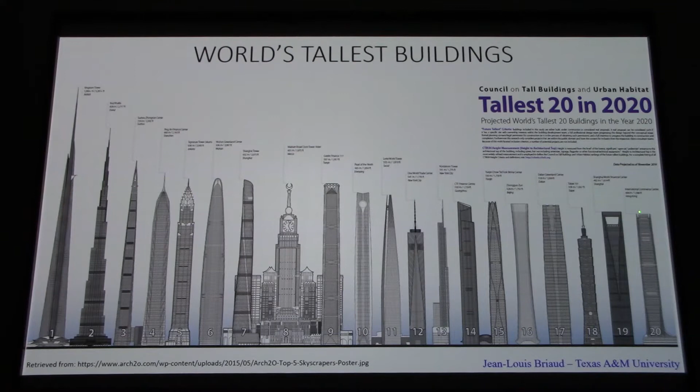So the Burj Khalifa - Burj means tower - is 828 meters high. It weighs 4,400 meganewtons. The area of the base, the foundation, is 3,400 square meters, and the average pressure under the tower is about 1,300 kilopascal. Remember, we've talked before about the Tower of Pisa being around 500, Washington Monument about 500. Today, on soils, we wouldn't put more than about 200 on a shallow foundation, typical. But this one is actually on rock, and that's why the pressure is so high at 1,300 kilopascal.

It was built on a pile foundation, a deep foundation. The piles are 50 meters deep below the mat foundation. So a mat was placed, there was an excavation about 15 meters deep below ground surface, and then the mat was placed, with the piles below that mat. The average soil/rock modulus is about 700 megapascal. We've talked about the modulus of soil being between 1 and 100 megapascal. This one is obviously beyond soils, soft rock around 700 megapascal. The pile capacity was around 30 meganewtons, which is huge for a pile - not a record number, but a very large capacity.

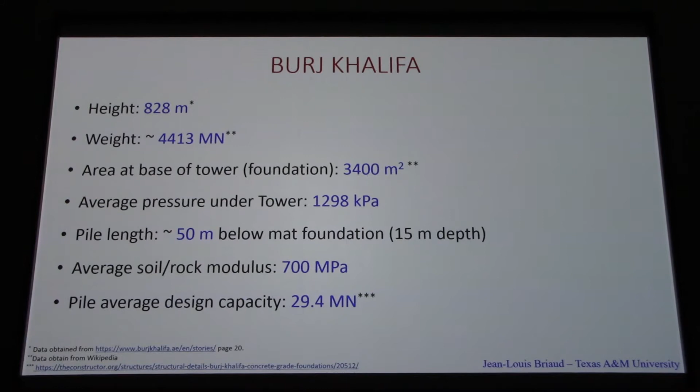So the geotechnical investigation took place. The rock is a calcareous rock with sandstone and siltstone layers. The water table is 2.5 meters below ground surface. About 33 boreholes were used for the investigation. Seven of the piles were load tested - we'll see that in a minute. And 60 pressuremeter tests were carried out. We mentioned the pressure meter in the last lecture as a tool that's quite helpful in obtaining the modulus. These tests were used to calculate the settlement of that huge tower.

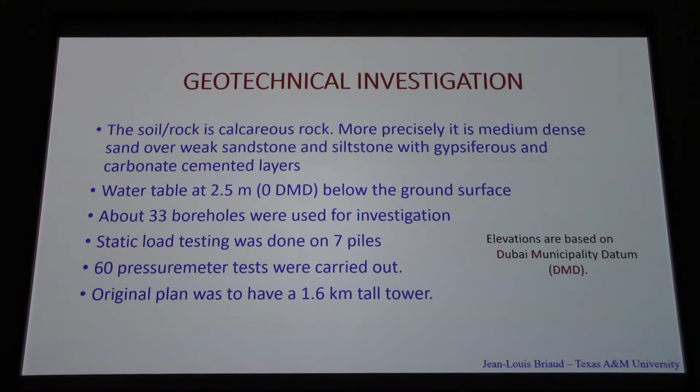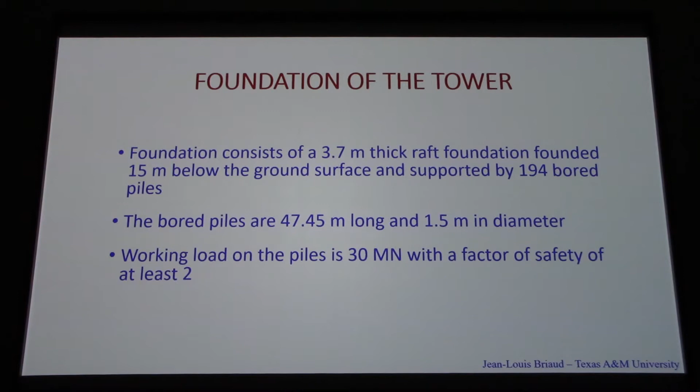The foundation, as I mentioned, is a mat that's 3.7 meters thick, and below the mat you have 194 bored piles. They are 47, so close to 50 meters long, and 1.5 meters in diameter. So again, not a record, but a large diameter anyway. The working load on the piles was 30 meganewtons with a factor of safety of at least 2.

So here is a cartoon of the tower with the foundation to scale. You can see that even though those piles are 50 meters deep, they're very small compared to the length of the tower. But it still looks reasonable, and that's one thing I've told you many times: make sure you start with a diagram to scale to get a sense of whether things are out of proportion, or maybe pick up on some potential problem.

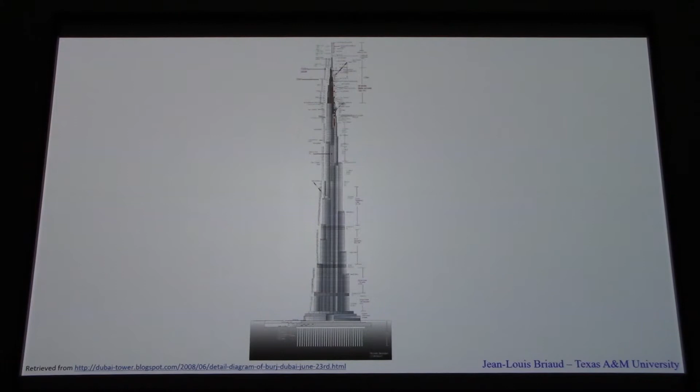I actually went to visit the tower, and I didn't go to the top. I went to the observation deck, which is around 450 meters high, and the elevators are extremely smooth. You get the feeling that you're not moving, and the only reason you know you're moving is because your ears are popping due to the difference in pressure. So it's pretty impressive. Again, I didn't go to the top.

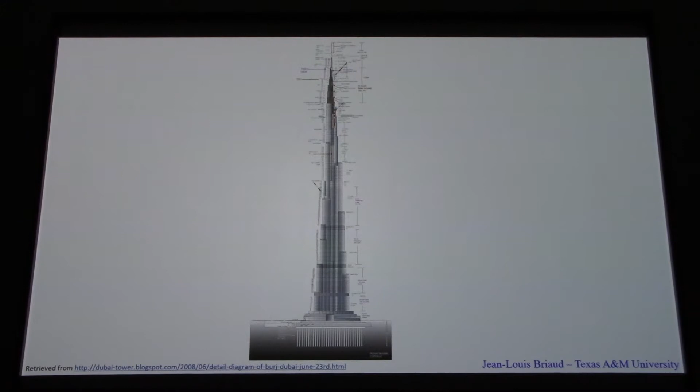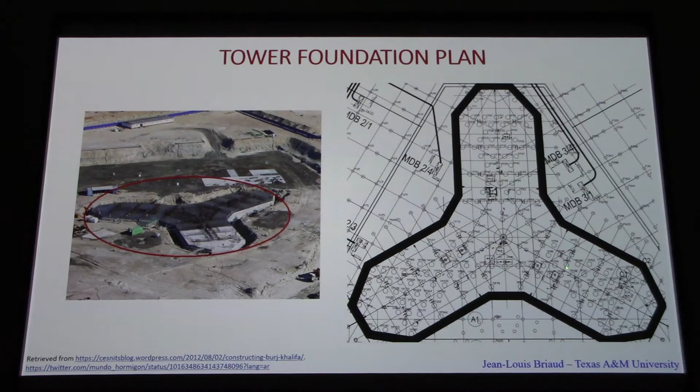So here is the imprint of the foundation. It's a tri-star imprint. You can see all the piles, those 1.5 meter diameter piles, distributed around.

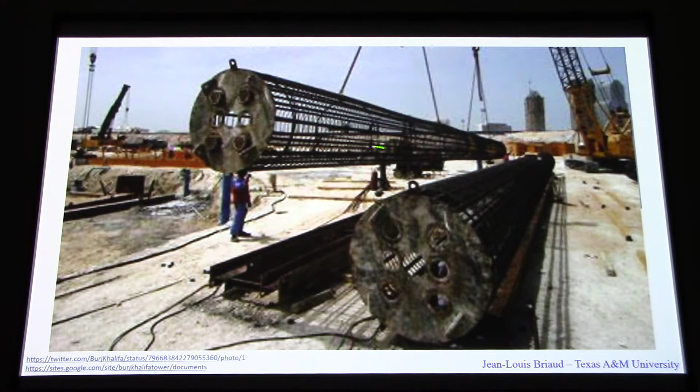Here's a rendition of the piles under the mat. The mat is right here, and the piles, you can see them underneath it. Here's the size of those bored piles with all the reinforcement going down to 50 meters.

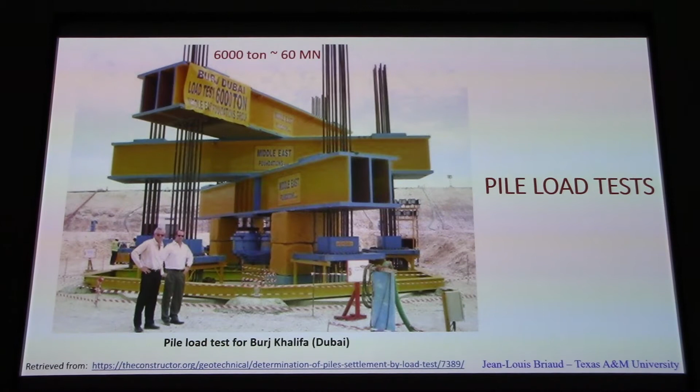They were load tested, and these pile load tests were large pile load tests. You had to go to about 6,000 tons, which is 60 meganewtons, to test the piles for close to 2 times the working load. These are pile load test results.

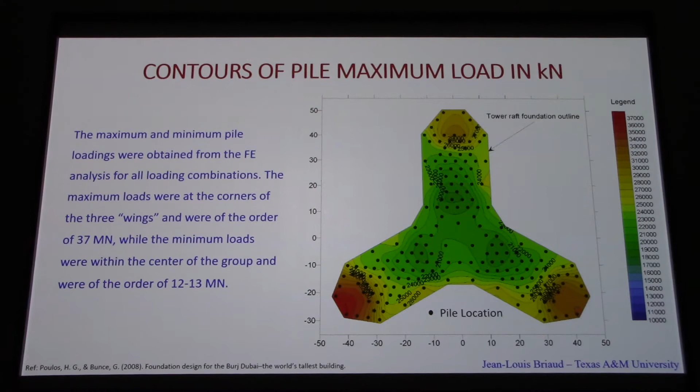I'll pass on this. This is a contour of the piles, and the red is 37 meganewtons. You can see the piles on the outside are more heavily loaded than the piles in the center, probably due in part to the overturning moment that loads the outside piles.

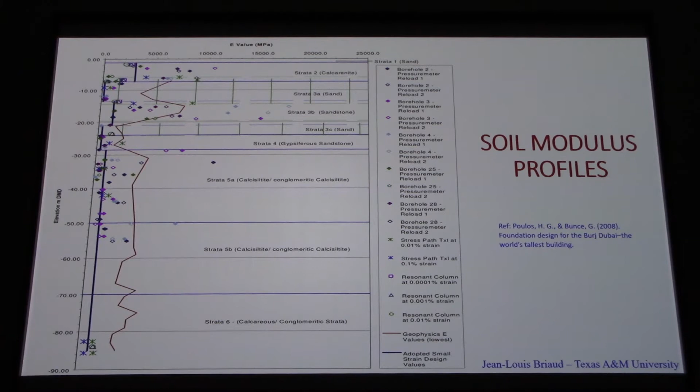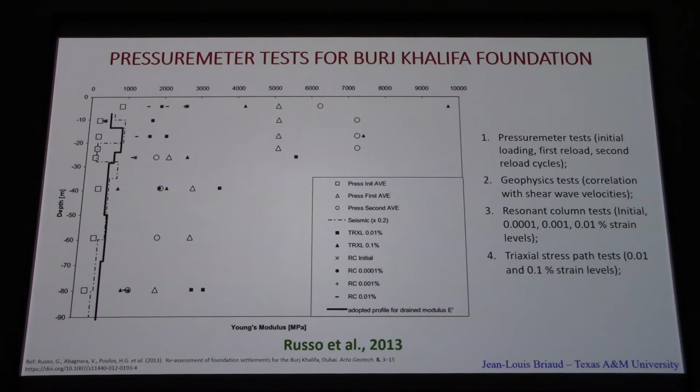Back to the soil modulus profile. Again, the need to select a profile to be able to calculate the settlement. This is isolating the pressuremeter test results, along with some of the other results, and then the final selection by the engineer to obtain the design profile. So somewhat conservative, but not all the way down to the bottom. Obviously it takes a lot of experience to make that type of selection.

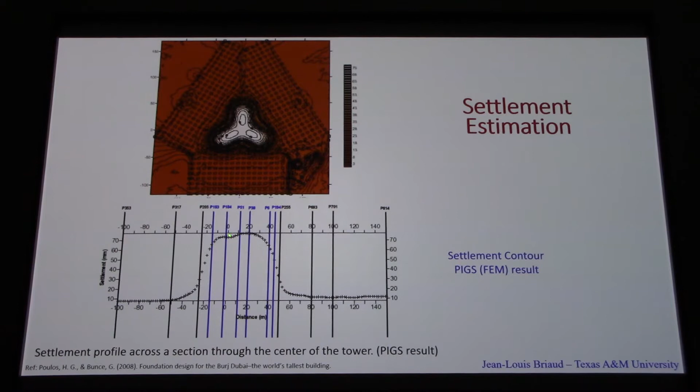This is estimating the settlement using the finite element method, and the settlement across the width here, and you can see the dishing effect of the foundation.

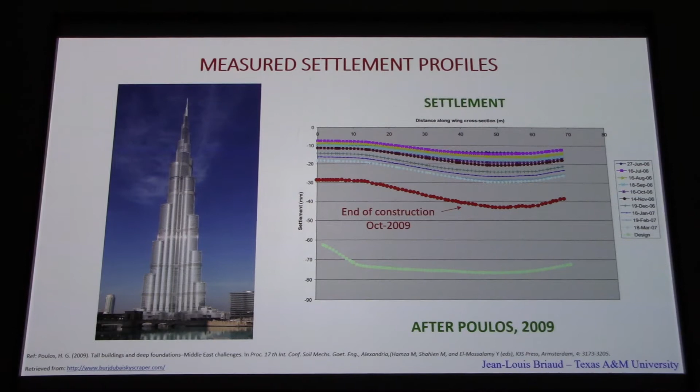So I wanted to include this because we just looked at that settlement equation in the last lecture: S equals I times 1 minus nu squared, times P, times B, over E, where S is settlement, I is the influence factor, nu is Poisson's ratio, P is the design pressure, B is the width of the foundation, and E is the elastic modulus. I was 1.3, you find this in the book.

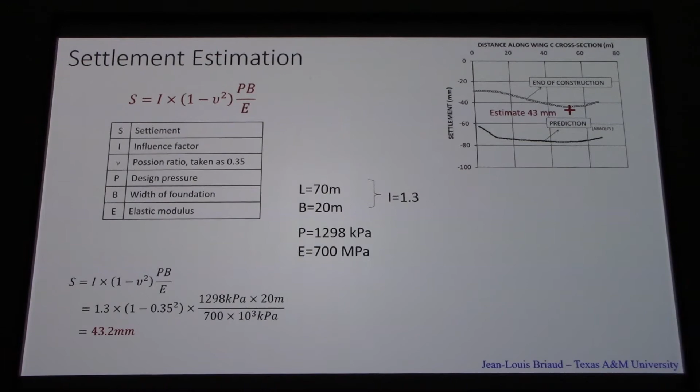The pressure we discussed is about 1300 kilopascals. The modulus from the profile, average modulus, is 700 megapascals. So if you apply that equation and multiply everything, you find 43 millimeters, which is remarkably close to the actual measurement. Obviously, the selection of this modulus here, we had the answer, so we were able to match one and the other. But the 700 megapascal is kind of an average value within that pressuremeter profile.

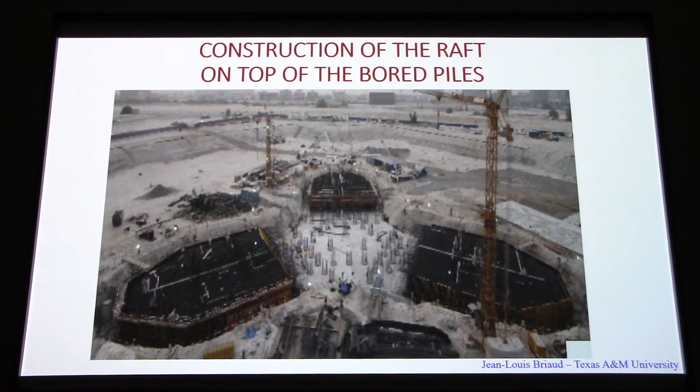So here is the foundation being constructed. You can see all the bored piles here, and then the mat, the reinforcement for the mat is being laid out. And then the mat is completed.

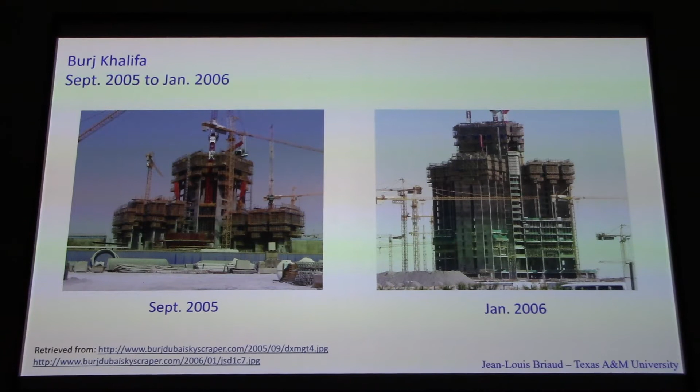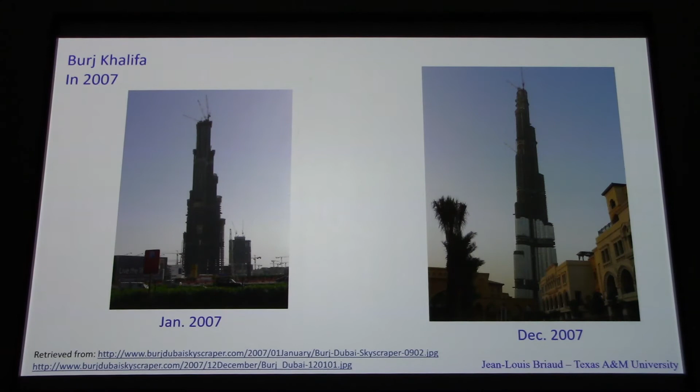So this is January 2005 right here, and then it keeps going. September 2005, January 2006, January 2006, December 2006, and then on and on and on. Coming into 2007, December 2007, January 2008, December 2008, and then December 2009, the completion of the tower.

So, when I look at those fantastic structures, I say to myself, these are my civil engineering colleagues building those structures, and that is mighty impressive. I keep being so excited to be a civil engineer that it really amazes me that civil engineers actually accomplish these remarkable feats.

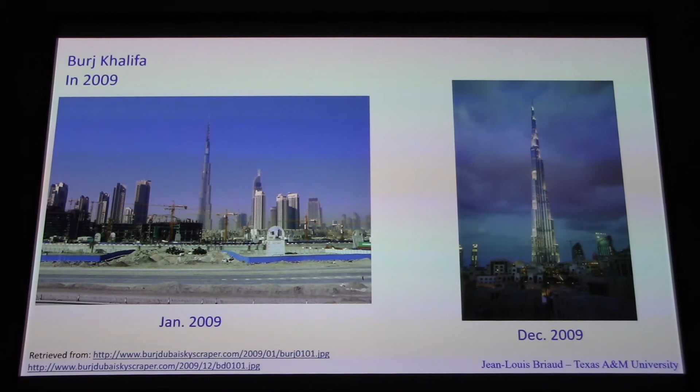828 meters, and a new one coming to 1 kilometer. This is mind-boggling. All right, let me get back to put the light on, turn this off.

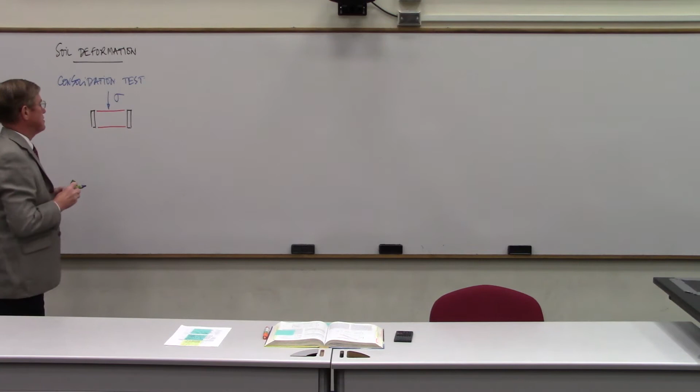We measure the amount of compression that the sample experiences. So this is delta H, and the initial height is H.

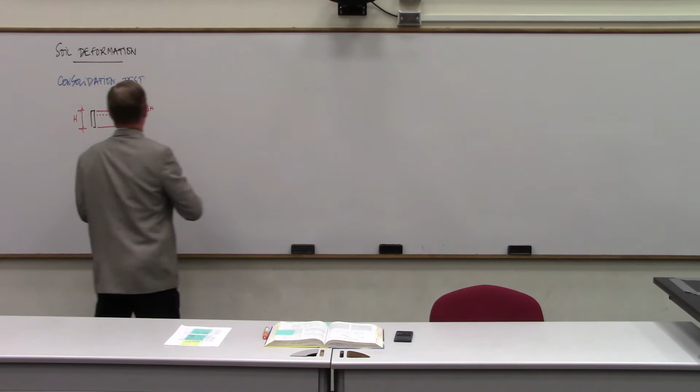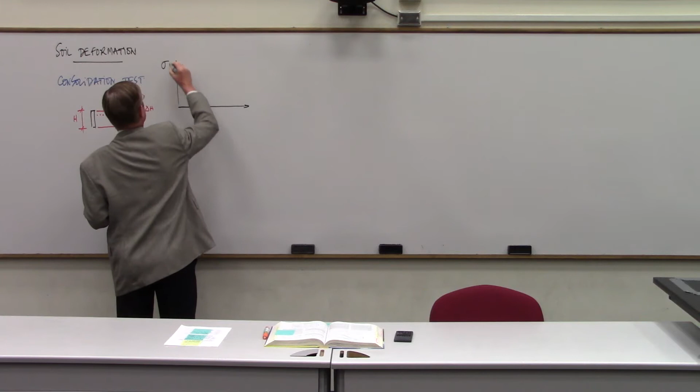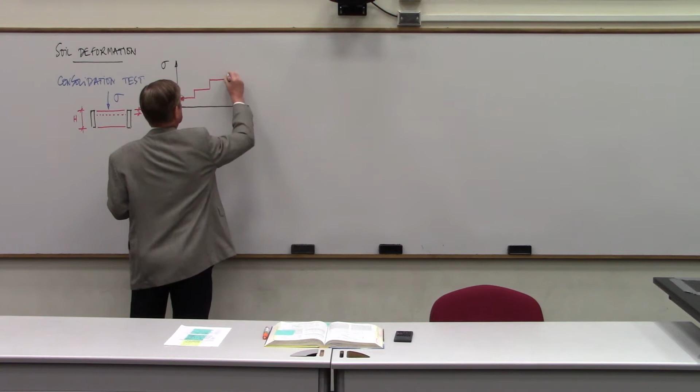The way we do this is that we increase the load in steps. There are several procedures, but let's put sigma versus time here. The loading is in steps: we start with a load, and then after a while we increase the load, and then we increase the load again, and so on.

The amount of time that we apply each load is 24 hours. So if these are steps A, B, C, D, at step B I'm going to be recording the settlement, actually the strain. I'm going to put epsilon equal to delta H over H here as a function of time.

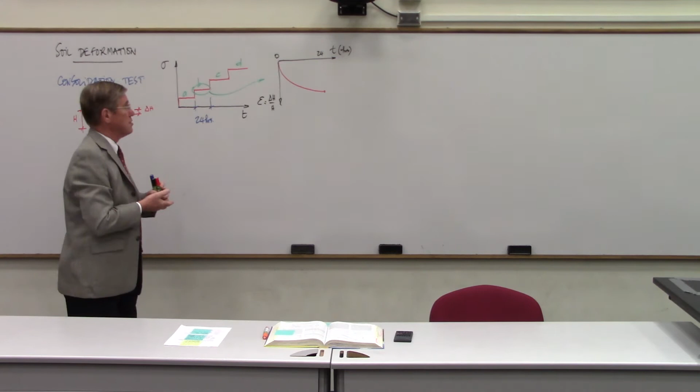During those 24 hours, the time is going to go from 0 to 24 hours, in hours. As I apply the load, the strain is going to increase and it's going to slow down. The idea is that 24 hours is long enough for all the compression to have taken place.

The process of consolidation is associated with this, so let me go back a minute. These tests are typically run for saturated, fine-grained soils. But it's also run for unsaturated soils as well.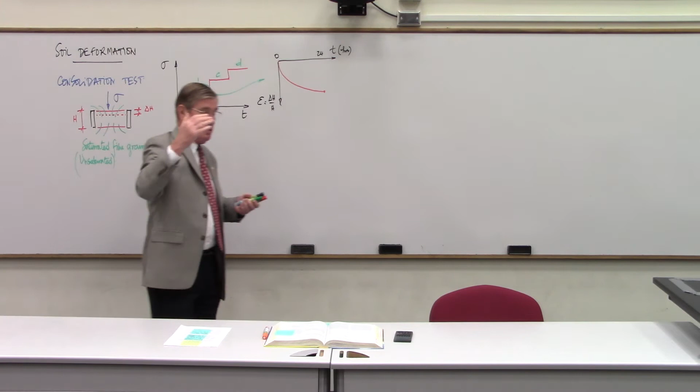For saturated soils, when you apply the load, it's very difficult for the water to get out easily and quickly. So you apply the load, the water is stressed and the water pressure goes up. Then as a function of time, it drains out through the top and through the bottom. So the water stress goes up, and then it goes down, down, down, until it comes back to essentially zero.

The choice of 24 hours is that, considering the thickness here, which is usually around 25 millimeters, about that thick full scale, the idea is that after 24 hours you have come to equilibrium. So this is an equilibrium point.

At that point you obtain here epsilon, and I guess it was step B, so we'll call it epsilon B. The stress right here was sigma B, corresponding to step B. This is the strain-time curve for a stress sigma B. Because at the end I'm assuming that after 24 hours I've got zero water stress left, sigma B is also going to be sigma prime B.

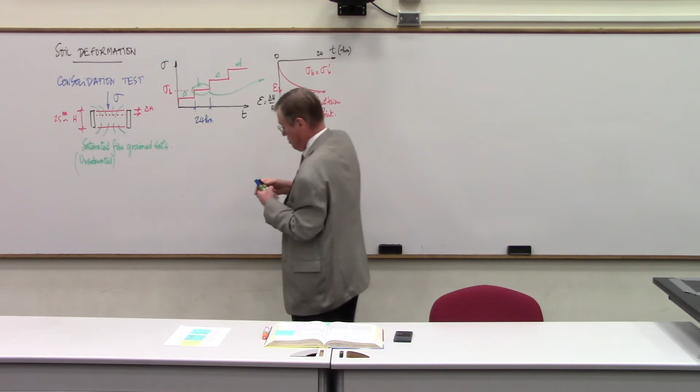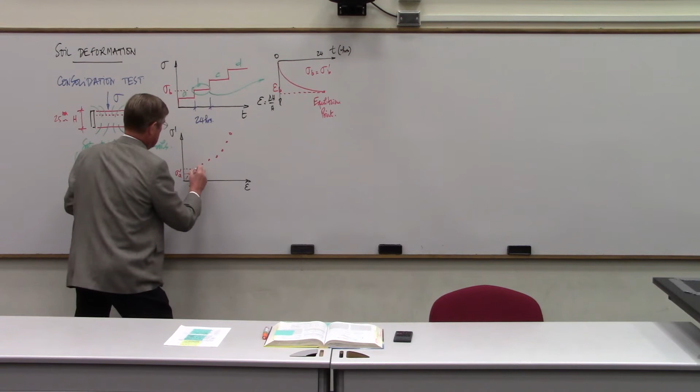In the end, by repeating all those steps, we're going to end up with a bunch of epsilon at equilibrium for B, C, D, and we will be able to plot a stress-strain curve showing sigma prime versus epsilon. Point by point, we put sigma prime A and epsilon A, sigma prime B and epsilon B, and C and so on, and that way we describe the curve: 1, 2, 3, 4, 5, and so on. That's the stress-strain curve.

Here I put it on the normal arithmetic scale, and you can see that there's something a little bit strange with that stress-strain curve. All the stress-strain curves I've plotted so far have always curved one way, and this stress-strain curve actually curls the other way.

The reason it does that is because the soil is confined into a steel ring. The more you push on the soil, the more the soil pushes on the steel ring, and the steel ring is not going to break at the stresses we're talking about. So here this is the soil, and the more you go, this is the steel ring. When you use that test, be careful that you don't go too far, because there is no steel ring under the Burj Khalifa or the Washington Monument, but there is a steel ring in the lab. Keep that in mind.

This is a typical way of plotting the stress-strain curve, but we don't plot it that way. What we plot is a curve with log of sigma prime on the horizontal axis, and we plot epsilon on the log scale on the vertical axis. When you do that, it deforms the curve, so you have the same points, and the curve looks something like that.

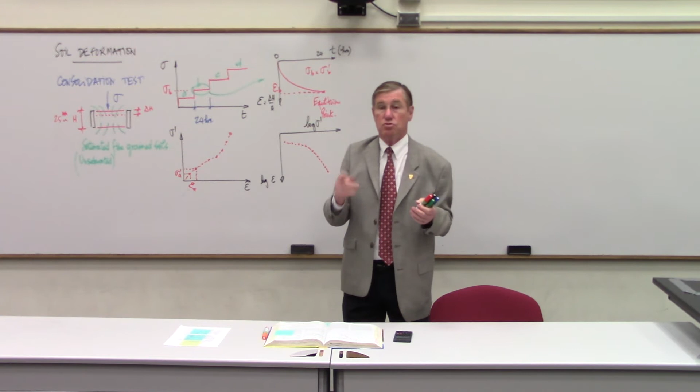And if you're not too sure, then run a couple of tests. Don't do just one test. That's what you saw at Burj Khalifa. There was some resonant column, triaxial test, pressure meter test, geophysics test, and then looking at the cross-section, some variation, and then you got to pick a design profile, which is not the easiest part, but a lot of people are working on this.

All right, so this is the type of curve, stress strain curve that we get. Each one of those points is an equilibrium point at the end of the 24-hour loading in that particular instrument. From this curve, we get a number of things, a number of information.

Often we will look at this curve and say, all right, here I have something that's reasonably linear, and here I have something that's reasonably linear. And some people have made some advanced construction techniques that can be used to find this important point right here that corresponds to what we call the pre-consolidation pressure.

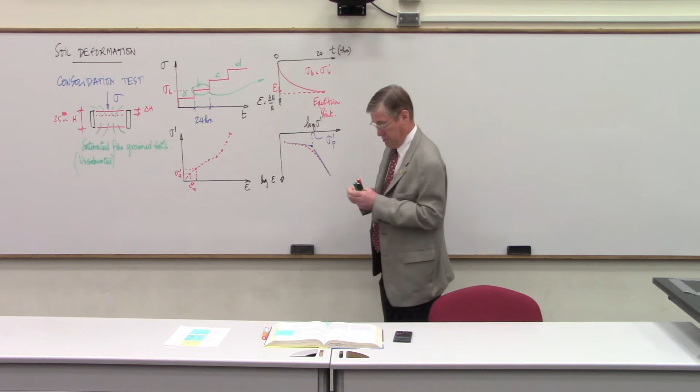And that's a very important pressure for several reasons. One of which is, if you can stay below that pressure when it comes to the stress that you're generating under the structure, then you're going to be in pretty good shape, because you can see that the epsilon here is quite small compared to the increase in stress. But when you start going beyond that pre-consolidation pressure, then you really dive into a different type of behavior where an increase in stress leads to a fairly large increase in strain.

So it's a little bit like a yield pressure, if you wish, as we use in concrete and steel and so on. We also define that slope right here.

Let me first go through a separate exercise. The reason is that often people put the void ratio here instead of a strain, so I need to create the link between the void ratio and the strain.

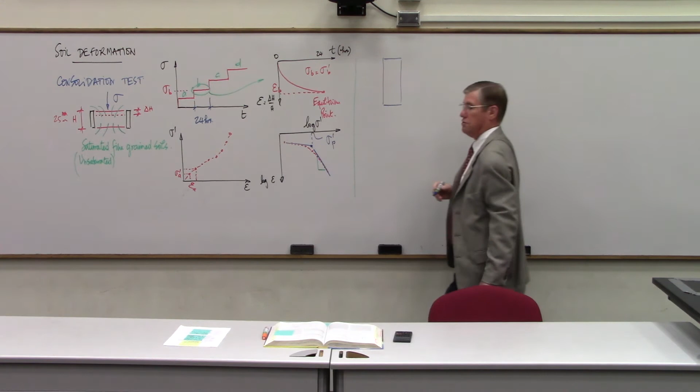Imagine that we have a sample. I'm doing a phase diagram, but I'm not going to go three-phase, I'm just going to do two-phase. So these are the solids right here, and these are the voids. This is the initial state, and I'm going to make the solid volume proportional to a unit value, 1 cubic meter. Then by definition, the void ratio is the volume of voids divided by the volume of solids. So therefore, if this is 1, then this is E.

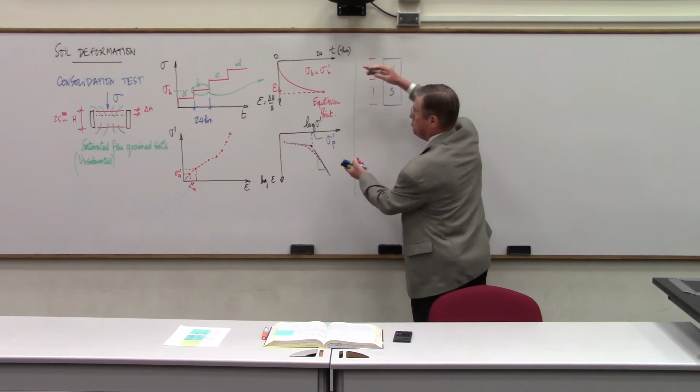When the material compresses, that whole picture is going to decrease in height, and I get to a second picture that looks like this. This is still the solid. The solid is a solid block of rock, so I cannot compress that. So this solid piece of block is still 1, while the voids have decreased.

So I'll put V1, V2, and then I'll have E1, and this is going to be 1 again because it hasn't changed, but this has decreased and become E2. And you can see that the change in height of this diagram is E1 minus E2, or delta E. And so the strain epsilon is going to be E1 minus E2 divided by the initial height, which is 1 plus E1, or delta E over 1 plus E initial.

So that's the link between the strain and the change in void ratio. So you can either put the strain here or the void ratio. It depends on the company where you work.

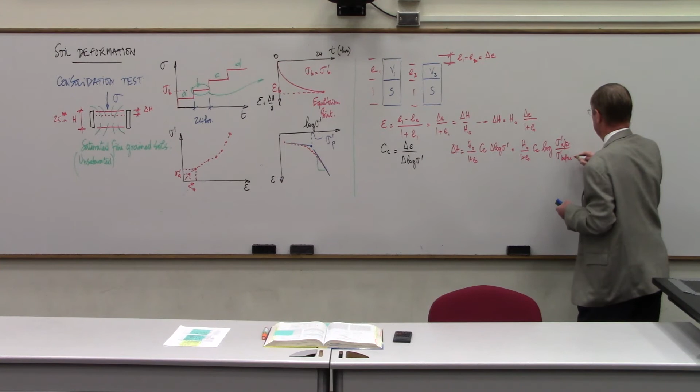So I've got H0 over 1 plus E0 times C sub C delta log sigma prime. And delta log sigma prime is log sigma prime 2 minus log sigma prime 1, or the ratio of the two stresses. So that's H0 over 1 plus E0, times C sub C, log of the stress sigma prime after the loading by the structure, divided by sigma prime before the loading. That's one of the root equations for calculating the compression of the layer using that slope.

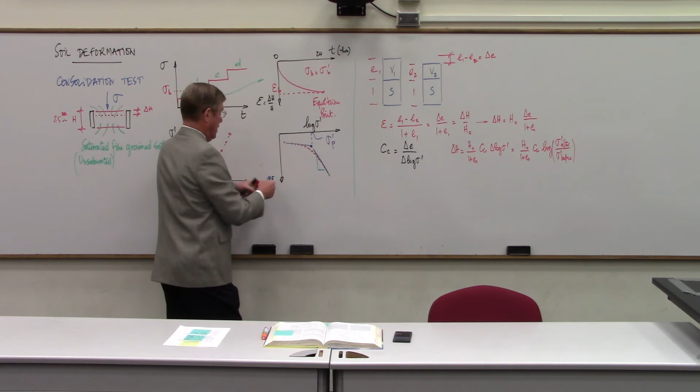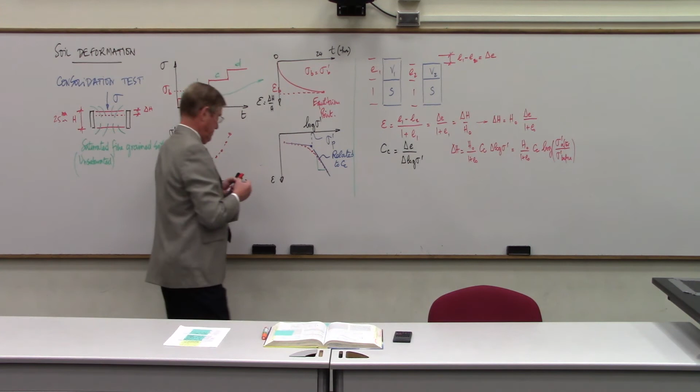This slope, in this case, is not C sub C, because C sub C is related to the void ratio version of the plot, so I'll note it here as related to C sub C. This other one is related to C sub R, because this is the recompression part of the curve. So these are the three things defined on that curve: C sub R, C sub C, and sigma prime P. If you change the axis to void ratio, then this is C sub R, this is C sub C, and this is sigma prime P. So the important definition is right here.

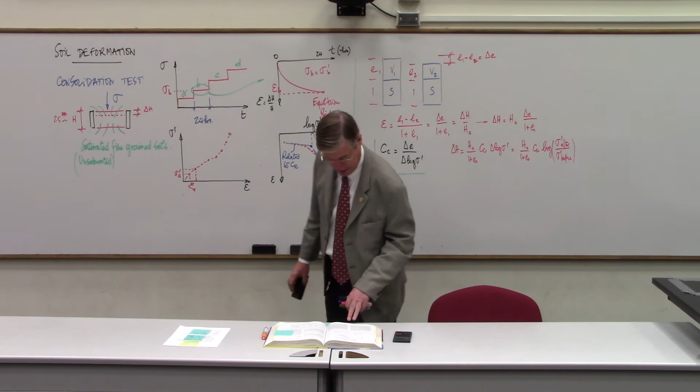All right. Now let me talk a little bit about the over-consolidation ratio.

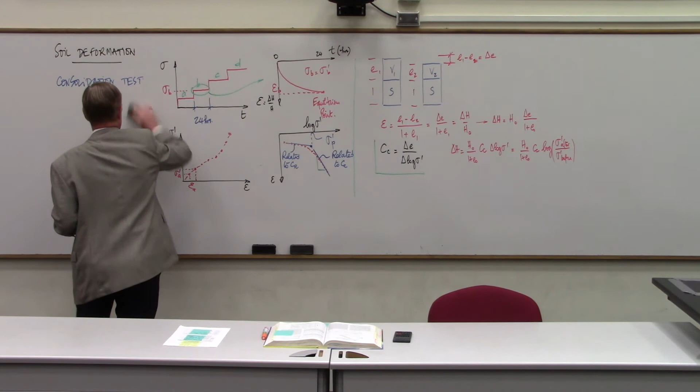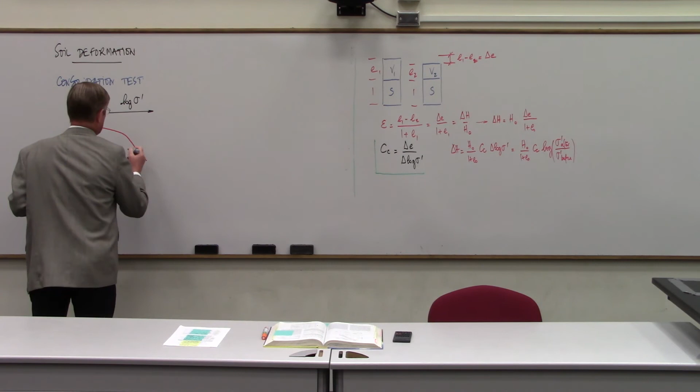So I'm going to recreate this curve, log sigma prime versus void ratio, and the curve looked like this. In that case, this slope was C sub C, and this was C sub R. And right here was the very important sigma prime P, the pre-consolidation pressure, given in terms of effective stress. This is the result of a consolidation test done on a sample taken from the field.

This sample may have been taken from 10 meters deep. On that sample, before we took it out, there was a certain vertical effective stress in the field at that point. Under that overburden pressure, we had sigma prime 0 vertical. You don't have to calculate that directly — it's the total stress minus alpha times UW, or if saturated, simply minus UW.

So that's sigma prime OV, and I can plot sigma prime OV on this axis. If sigma prime OV is less than sigma prime P, that means that sometime in the past the stress on the soil was higher than today — we talked earlier about Chicago and ice, and so on. That's an indication the soil has been over-consolidated, so we call this over-consolidated soil, or OC.

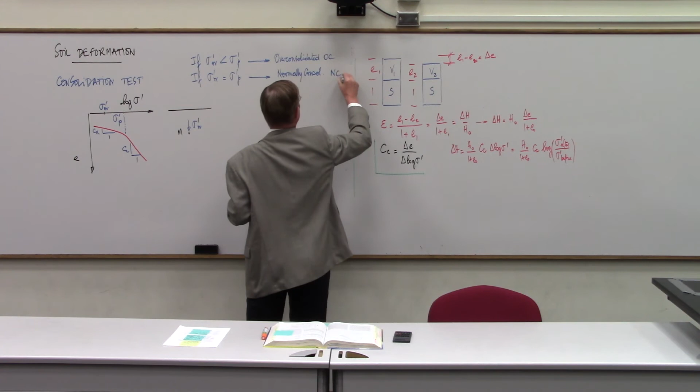If sigma prime OV is approximately equal to sigma prime P, we talk about the soil being normally consolidated, or NC. We further define the over-consolidation ratio, OCR, equal to sigma prime P over sigma prime OV. This OCR plays an important role in many of the correlations we develop in soil mechanics.

This equation right here, delta H equal to this, will depend on whether your increase in stress keeps you on this side of the curve or crosses over. There can be two situations. If you have this situation, log sigma prime here and E or epsilon on the other axis, this is C sub R and this is C sub C.

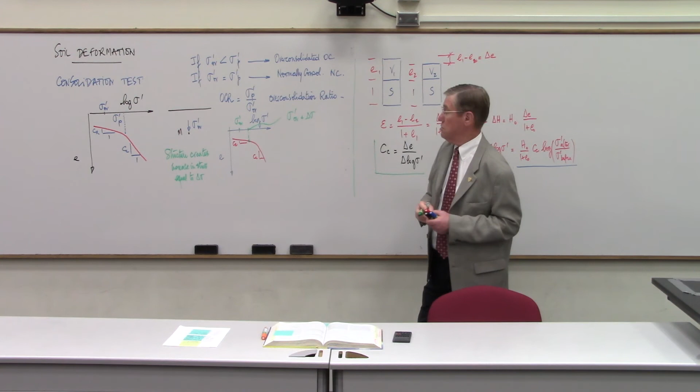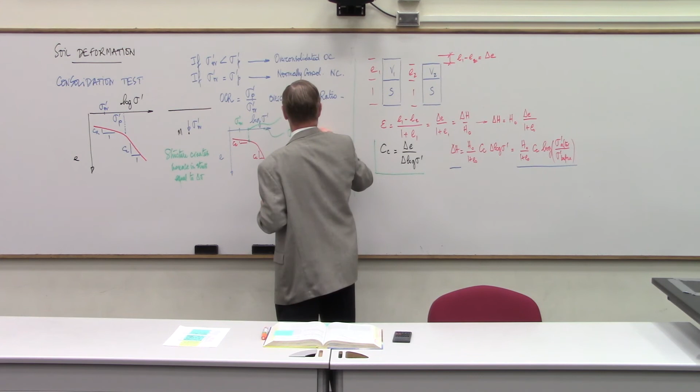The pressure before is sigma prime OV, and then the structure you're building creates an increase in stress equal to delta sigma. So before the structure, you had sigma prime OV, but after, this value becomes sigma prime OV plus delta sigma. If sigma prime OV plus delta sigma doesn't reach the pre-consolidation pressure, you have one behavior and equation. If, on the other hand, it reaches past that point, then you have both recompression behavior and virgin behavior to take into account.

All right, so let's see now how we can calculate the settlement of a structure. I gave you an equation, the elastic equation, which is simple and quite useful. But there's a general approach for settlement calculations.

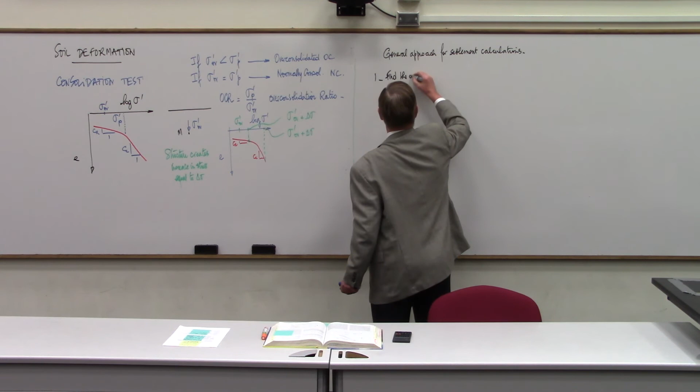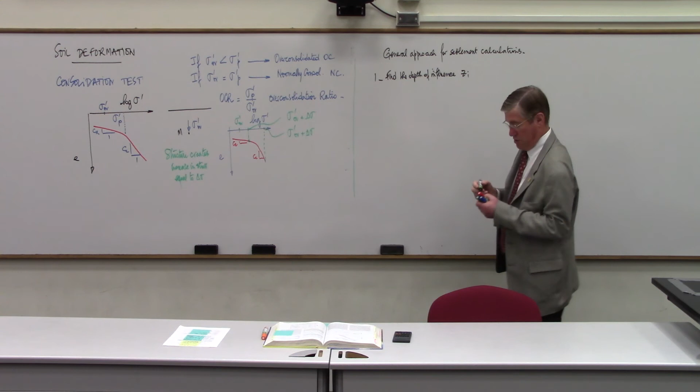There's a number of steps, and I'll go through those. One, find the depth of influence. We'll call that Z sub I. In other words, if you have a certain structure with a certain width, how far is the soil going to feel the influence of this new load? How deep down?

Two, divide Zi into a number of layers, soil layers. Typically minimum 4, maximum 10 if you're going to do by hand calculations.

Three, calculate the vertical effective stress in the center of each layer. We'll call that sigma prime 0 vertical. That's the one before any load is applied.

Four, calculate the increase in stress due to the load. We'll call that delta sigma. That's what I was talking about on this consolidation curve beforehand.

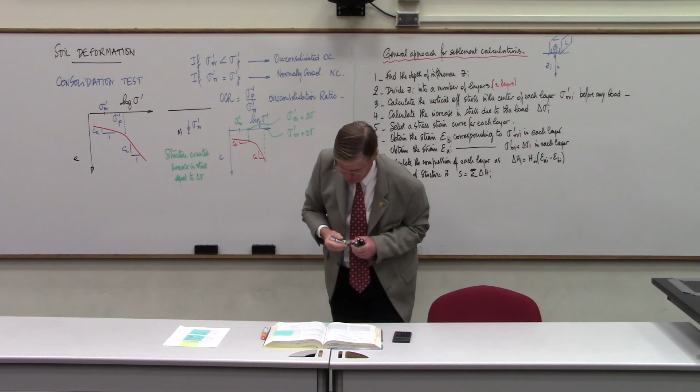Z sub I is the depth that - so you have a certain structure that has a width B, and then you have a certain Z sub I, which is the depth to which the soil is going to be compressed due to this additional load of width B. And there's a certain length in that direction - the length L and the width B. We take Z sub I equal to 4 minus 2B over L. It's a simple equation that gives you an estimate of how deep the zone of influence is going to be.

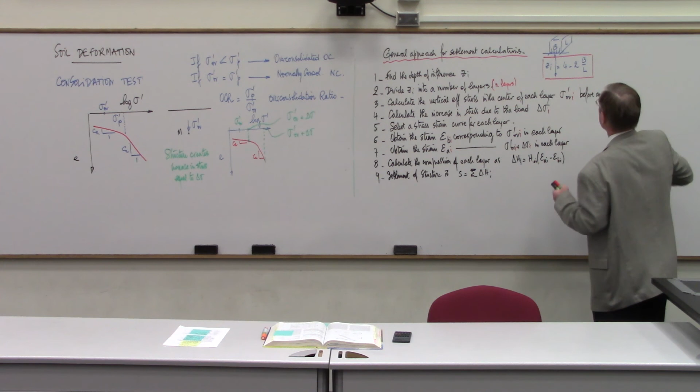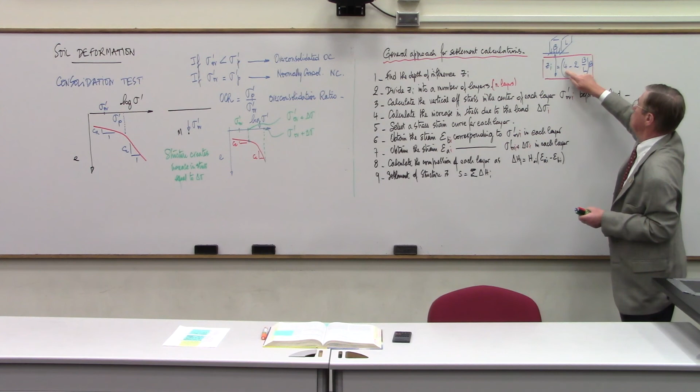So if B is equal to L, if you have a square foundation, you have 4 minus 2 times B over L, which is 1, so ZI equals 2B. The depth of influence below a footing that's square with width B is going to be 2B. If you have an infinite long footing, B over L is 0 because L is very large compared to B, so you have 4B. So if you have a strip footing, a very long footing with width B, the depth of influence is going to be 4 times the width of the footing.

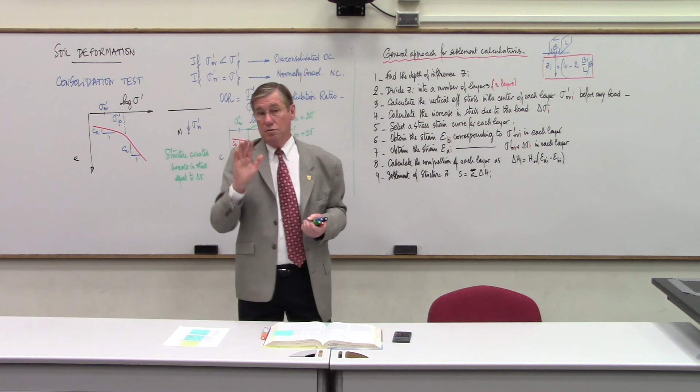So I'm going to stop right here, and in the next lecture we'll start talking about the increase in stress and the selection of the stress-strain curve so that we're able to calculate the settlement of large structures like the Burj Khalifa - though for that we don't do calculations like this by hand, you can, there's nothing wrong with it, but typically it's done by finite element method because of the scale of the project. But this method is very general and includes the solution I mentioned with the elastic solution. Next time we'll talk about stress increase with depth, which stress-strain curve to select, and then the consolidation theory and how we can predict the time it takes for all that settlement to take place.